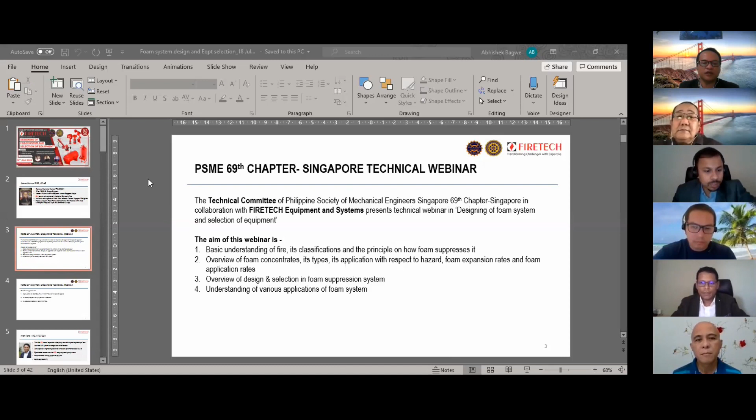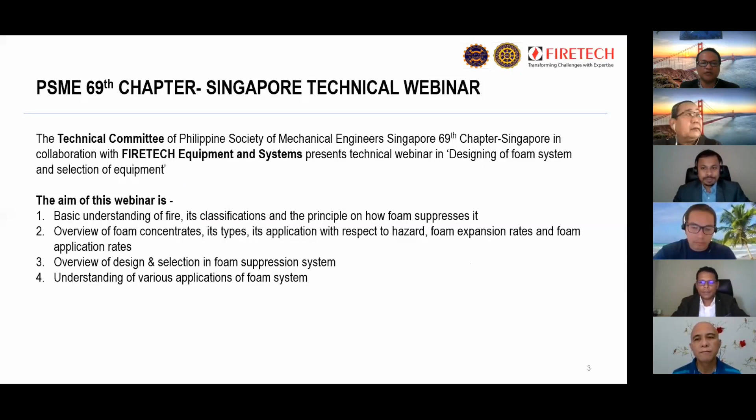Then, oh, sorry. Wait. Where's the screen now? Abhishek. Just give me a minute. There was a bit of a technical glitch, a small thing. So I can control, right? You maximize the screen? Yeah, I'm just doing that. Can you see it? Okay. Apologies. No problem. So these are the speakers for today. I myself, then second is Mr. Kiran Rane. I can control the page, Abhishek, right? Maybe I request for control. Okay, now I can control. Wait, better Abhishek, you can control. Sorry, I cannot control here.

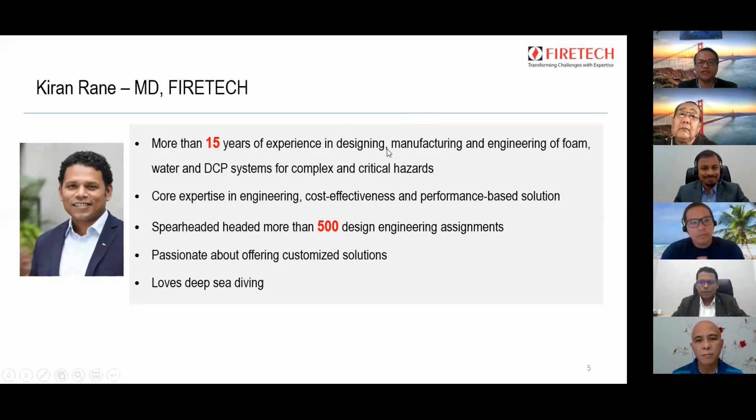So Mr. Kiran Rane, sorry for that technical thing. He has more than 15 years in designing, manufacturing, and engineering foam, water, and DCP systems for complex and critical hazards. He has core expertise in engineering, cost effectiveness, and performance-based solutions. He spearheaded more than 500 design and engineering assignments, is passionate about offering customized solutions, and loves deep sea diving. There's a lot of this in the Philippines. Yeah, sure. So I'll be there to have a deep dive.

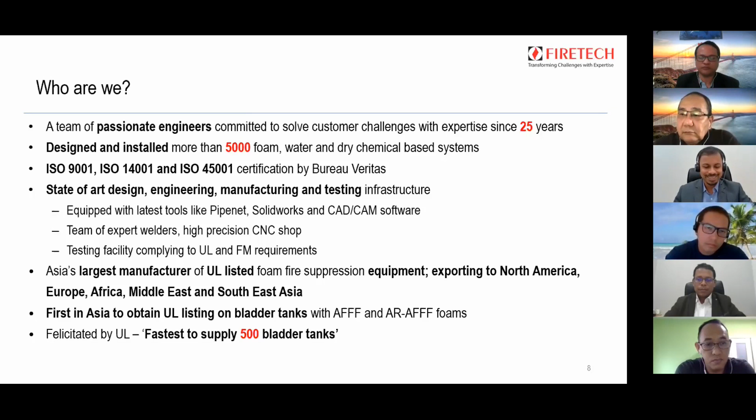With that, I move on, and James, you can take it forward, and we come in as and when required. James, over to you. Okay. Thank you so much. Just help me with the control, yeah? Okay. Yeah, sure, not a problem.

Now, before our specialists go through the detail on the foam suppression system, wherein they are going to talk about design, selection of equipment, application rates, foam proportioners, bladders, let me go through the basics first, okay? It's good to understand the basics before we go to the complicated ones. It's always the basics that will give us the full knowledge. Now, as you can see here, this is the tetrahedron of fire. For fire,

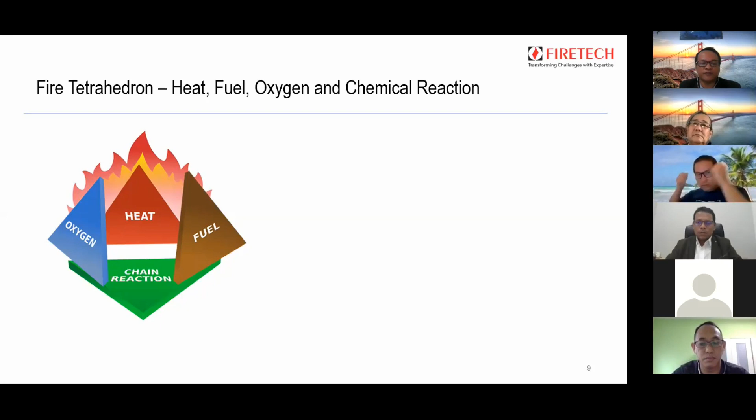So what is fire? Fire has basic elements. Number one is fuel; it is the material that burns. Then we have the oxygen; it is the one that oxidizes the fuel to release energy. Heat initiates and sustains the oxidation process. And the chain reaction that combines these three sustains and propagates energy release.

So by taking out any one from here, either the fuel, or you take out the oxygen, or you don't apply heat, there will be no fire; it's going to be extinguished. So I hope this basic is very clear to us. Next page.

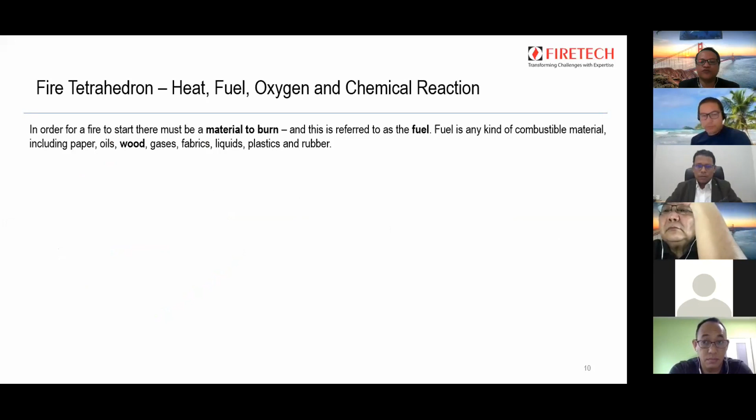In order for a fire to start, there must be a material to burn, and this is referred to as the fuel. So fuel is any kind of combustible material, including paper, oil, gases, fabric, etc. Now, let me just tell you this basic thing. How does a fire ignite? If you can see on the screen, let's say the fuel is a paper.

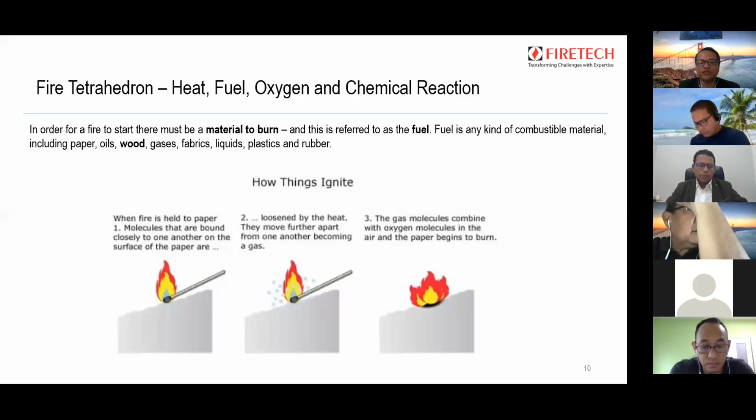Paper, originally the molecules are intact to each other. Upon applying heat, these molecules will separate or loosen further apart from one another, becoming gas. Those gas molecules, when exposed to air, which has the oxygen, are the ones that begin to burn. And later on, you can see that is where the foam comes in to blanket that vapor and the fire.

There are different types of fire. Type A is a combustible fire that has wood, paper, and cloth as fuel. Type B is flammable liquids: gasoline, propane, and solvents. Type C is a fire created by electrical equipment such as computers or machinery. Type D is combustible metal such as magnesium or lithium. And type K is cooking media such as oil.

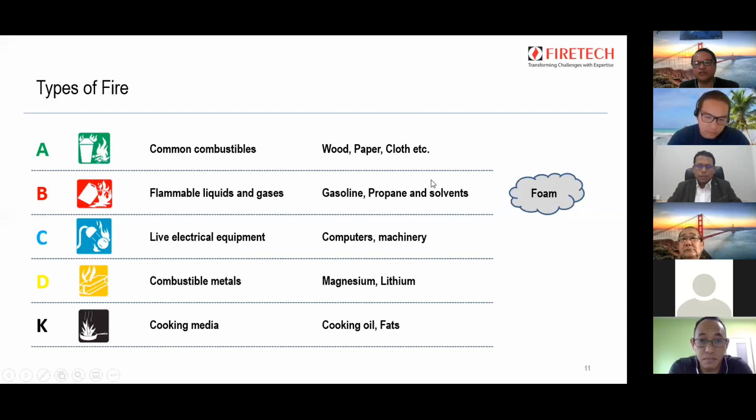The foam suppression, the foam itself, will come to type B. So next click. So the foam is the one responsible to extinguish the type B fire. Then from there, it involves two types of type B products: hydrocarbons and polar solvents.

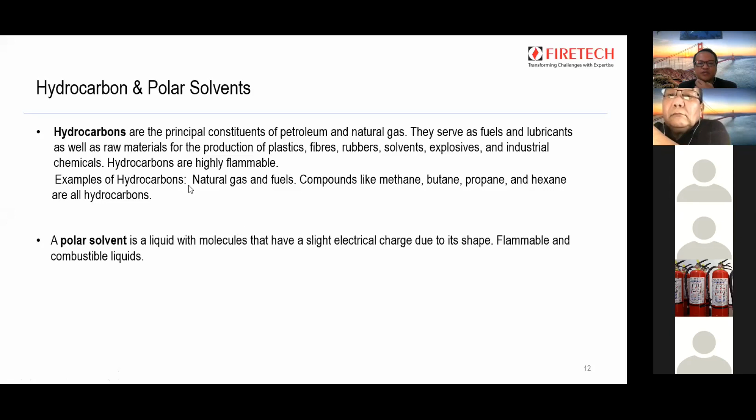In hydrocarbons and polar solvents. Hydrocarbons are the principal constituents of petroleum and natural gas, fuels and lubricants, as well as raw materials such as fibers, rubbers, and explosives. Example of hydrocarbon,

You can hear me? You can hear me, right? Okay. Yes, okay. I can hear you. I saw my screen, unmute the speaker.

Natural gas and fuels, compounds like methane, butane, propane, and hexane. A polar solvent is a liquid with molecules that have a slight electrical charge. Examples of these are acetic acid, methanol, ethanol, and butanol. Both hydrocarbons and polar solvents are highly flammable and combustible fuels or liquids.

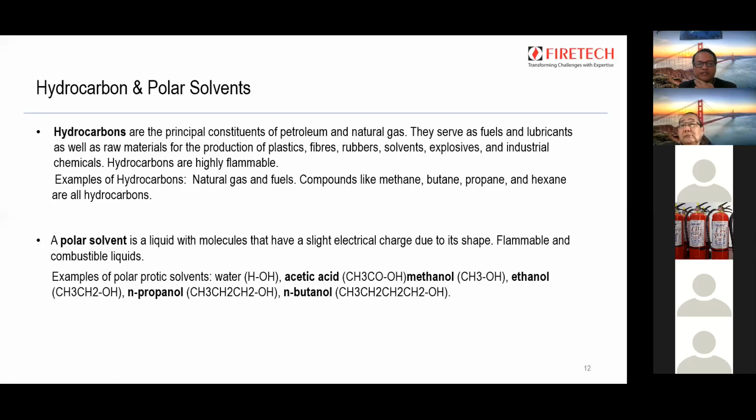Okay, how does foam extinguish fire? You remember a while ago, I talked about when fuel is heated, it will create a vapor. So when foam is applied, it will create a layer of foam. This layer will isolate the air outside, including the vapor formed from the fuel itself, so that continuous fire will not push through. In other words, there is blanketing happening here of the fuel from the oxygen.

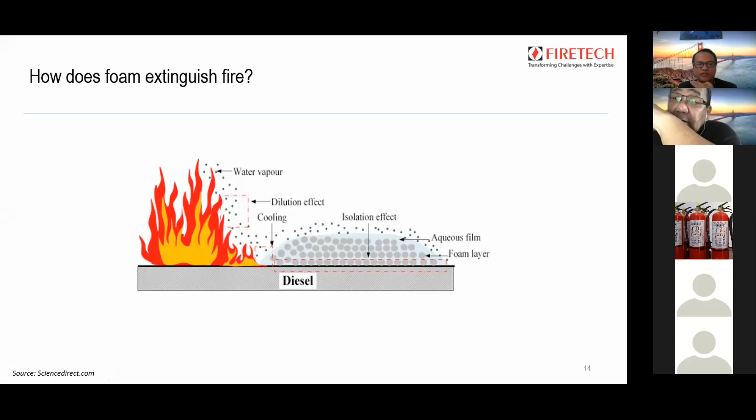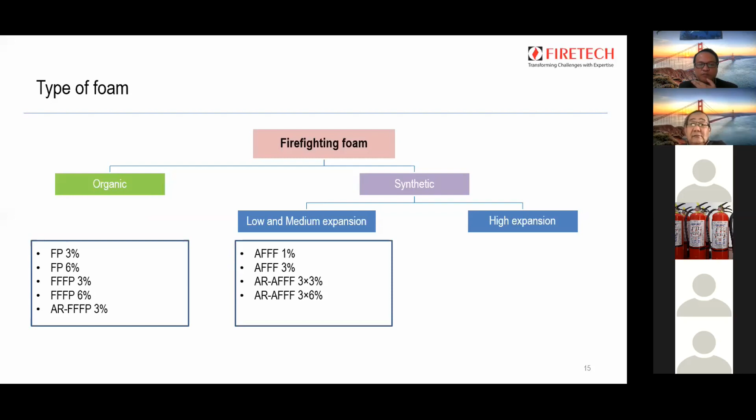We have types of foam. For firefighting foam, we have organic and synthetic. Under organic, we have the FP or FFP. Later, I'll tell you what's the meaning of this. AR-FFFP, 3%, 6%. Same thing in low and medium expansion and high expansion. Then next page.

Protein foam, that's the FP. This is a foam that is composed of biodegradable materials. They flow and spread slower, but provide a foam blanket that is more heat resistant and more durable. Next.

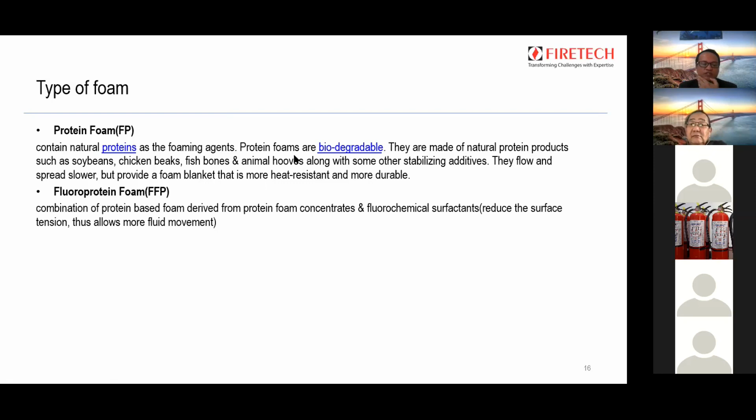The FFP or the fluoroprotein foam. This is a combination of protein-based foam derived from protein foam concentrates and fluorochemical surfactants, meaning this foam reduces the surface tension. That's why this foam has a good flowing movement.

Next is the AFFF or the aqueous film forming foam. This is a foam consisting of fluorochemical and hydrocarbon. This is like the improved FP and FFP. It is designed for rapid knockdown, but sacrifices heat resistance and long-term stability.

Next. The FFFP or the film forming fluoroprotein. This again is a foam with more advanced fluorochemical surfactants. It combines the burn-back resistance of FFP and the knockdown power of AFFF. So it's a combination of these two.

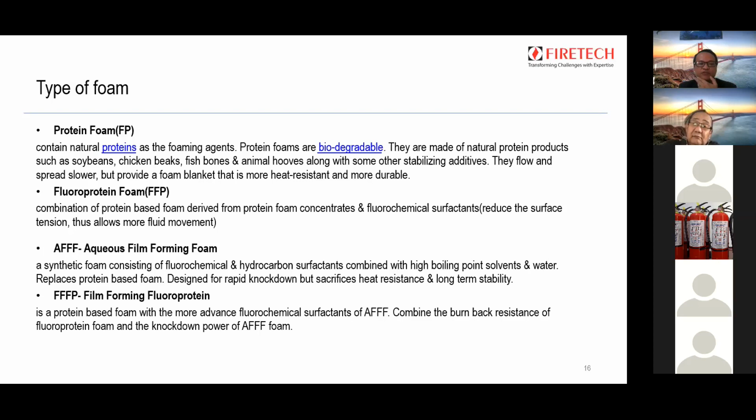Finally, there is AR-AFFF. What is AR-AFFF? This is the alcohol-resistant foam. The alcohol-resistant foam is the latest foam that's being manufactured. It's a synthetic foam, wherein this foam can be applied in both hydrocarbons and polar solvents.

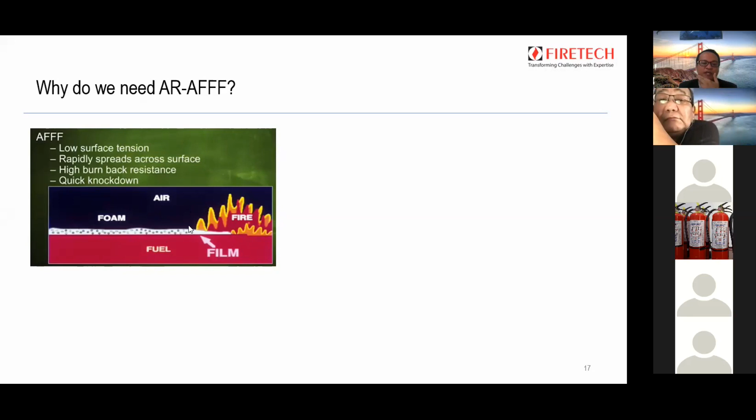So if you can see in this figure, normally if they use the AFFF foam here, because it rapidly spreads across the surface, a thin layer will happen. But when we use it on polar solvents, that thin layer can easily be broken down. So that's why ARFFF was introduced into the market. This ARFFF can resist the solvent from destroying the foam blanket. In a sense, it's more viscous. Okay, next.

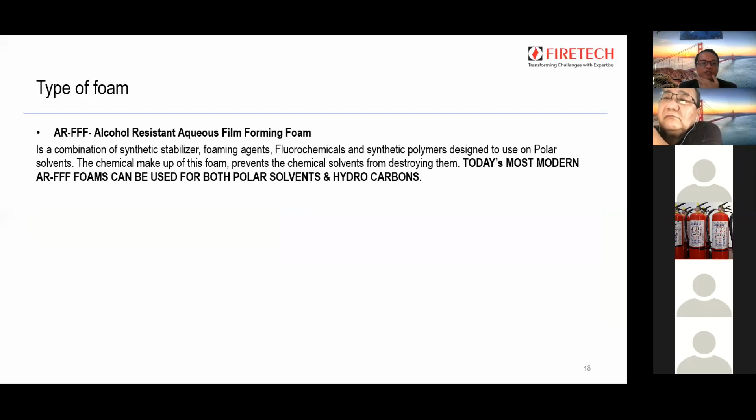This is the ARFFF aqueous foam. It is a combination of synthetic stabilizer foaming agents, fluorochemicals, and synthetics. Like I said a while ago, today's most modern ARFF foams can be used on both polar solvents and hydrocarbons. That's why for most of the solvents being considered, they opted to go for alcohol-resistant foam. So we go to the chart.

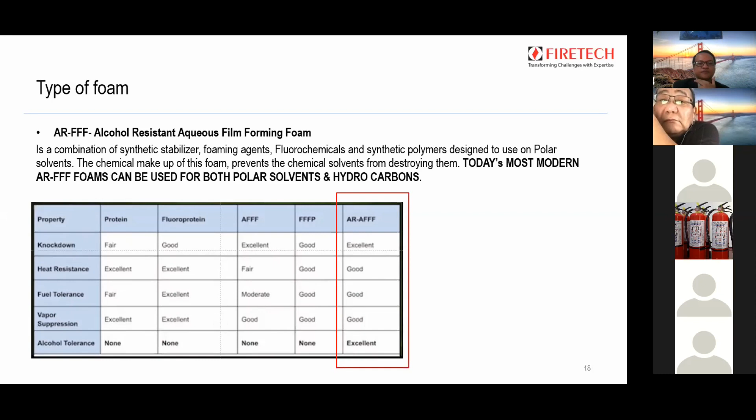And then the foam expansion types. Okay, you just tell me if I'm too fast. It's okay. Okay.

After knowing those classifications, foams also have expansion ratios. For low expansion, it is up to 20 times. For medium expansion, it is up to 200 times. And for high expansion, it is more than 200 times.

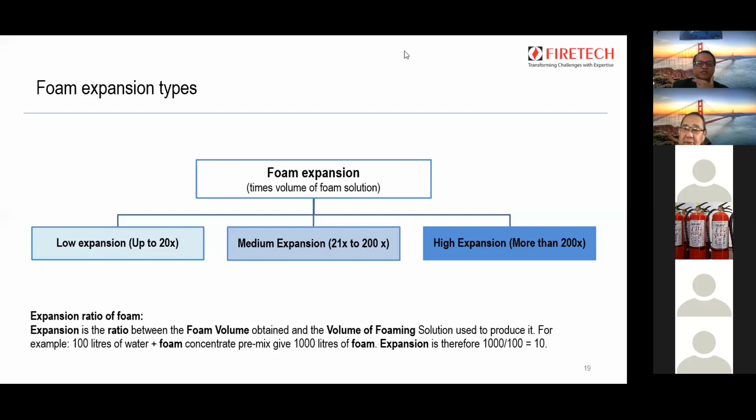Next. The meaning of this expansion is this. For example, you have 100 liters of water. You add the foam concentrate premix and that gives 1,000 liters. The expansion ratio will then be 1,000 divided by 100, which is 10. So it belongs to low expansion foam.

So next. Yeah. So those are the basics of foam. You were able to know how it extinguishes fire, what the types of foam are and which foam is really good to use in the market now, and you were able to know the expansion rates of foam.

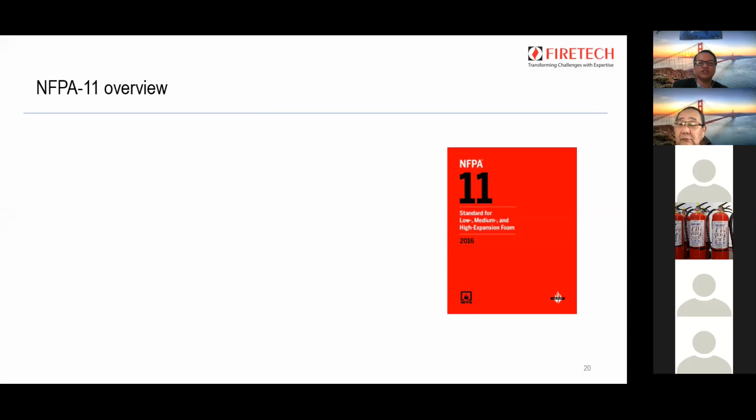Now, for the next topic, there will be an overview of the NFPA and a more detailed discussion on the equipment, application rates and so forth about foam suppression systems. And this will be under Kiran Rain, the managing director of Firetech. So Kiran, I give you the floor.

Okay, thanks, James, and it was wonderful to explain the basics of foam because it's always good to build on the basics. Am I audible, James? Yeah, we can hear you. Yeah, perfect. So James, thanks again, and I would like to take it further from here. So very good afternoon to all of you.

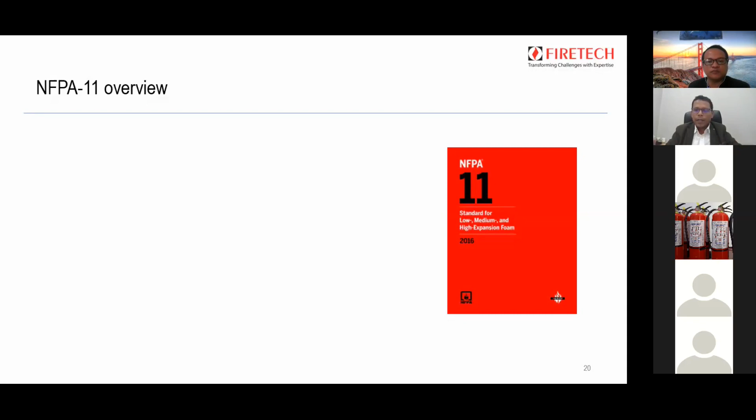Now, basically, we all know that NFPA is the National Fire Protection Association, which is based in the USA, and they have been formulating specific standards related to the different types of fire protection systems existing today in the industry. NFPA 11 has been one of the oldest standards in the industry, and it covers low expansion, medium expansion, and high expansion foam systems. The first edition was published in 1921 by the NFPA committee, and there have been several editions as of now.

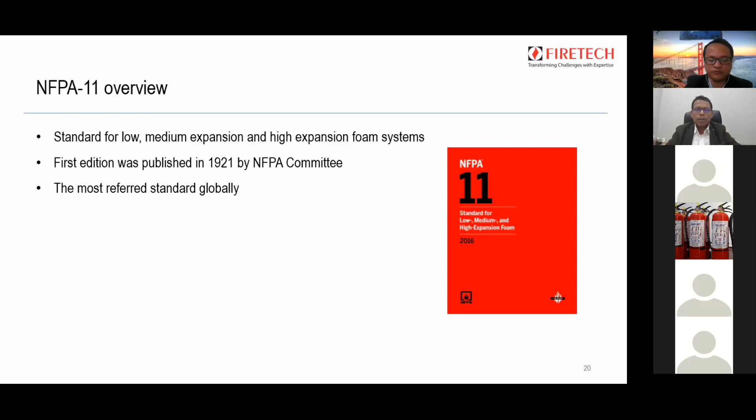And the current edition is 2016. We expect that 2020 would also be soon published by NFPA. And this is one of the most referred standards globally. It has been referred by various firefighting professionals, right from designers, consultants, HSE officials, as well as certification agencies like UL and FM. So this standard also covers how to measure the performance of a foam system, and major approval standards have been based on NFPA 11 specific to the foam system.

This standard basically addresses the 5 critical issues. The first being the design, how to go about designing the different types of foam systems, again with respect to every hazard. What should be the specification and plans for a foam system? The installation requirements with respect to how to install the system, what is the environment in which the system should operate, what are the operating parameters.

The most important part is the testing and acceptance. Designing a foam system is one thing, but ensuring that the foam system is able to perform and give the desired design performance is of utmost importance, because ultimately the foam system is designed to perform.

And most of the times, as per my experience, I found that testing and acceptance in some geographies has been on a lower context, and this is where we are experts in taking responsibility right from the design stage to the commissioning stage. We also depute our engineers globally wherever it is required to commission a system with respect to the design parameters, and we also give a test report related to it.

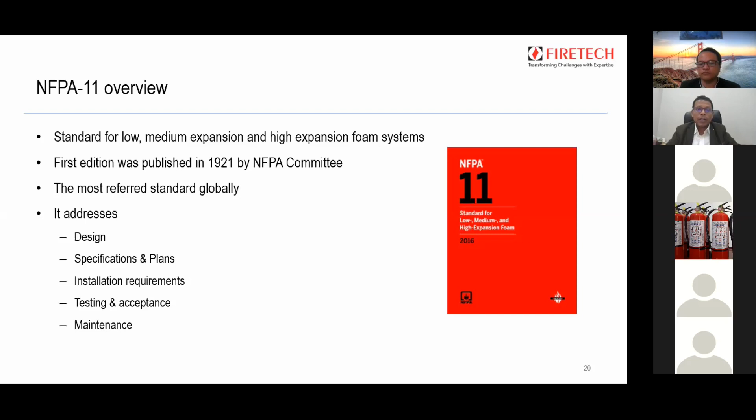Yeah, Abhishek. So basically, there are various hazards protected by NFPA 11. NFPA 11 is a very extensive standard. Actually, this whole webinar of 1.5 hours cannot cover the complete in-detail design aspects and all the hazards which can be protected by NFPA 11. So what I have done is, we have classified the foam system based on the expansion values, because that is how people specify a system, either to go for a low expansion, or a medium expansion, or a high expansion.

Now, low expansion foam systems are those systems where the expansion value is limited up to 20. So the expansion value is determined by the foam discharge device, which I will come to later. The expansion value is basically the output of the foam system, which is applied to the fire. So if the foam is expanded less than 20 times, there are various hazards you can protect using a low expansion foam system. Examples are storage tank protections, and these can be hydrocarbon storage tanks or polar solvent storage tanks.

Dike and bund area protection. This is used majorly in the chemical and paint industries to protect the dike in case there is a spill of flammable liquid into the dike, which is quite recurrent in chemical and pharma industries. So this system helps you suppress a fire in the dike. Warehouse protection, where you have storage of flammable, toxic and hazardous liquids. Process platforms like offshore process platforms or even chemical facility process platforms. Helipad protection also comes under low expansion foam systems.

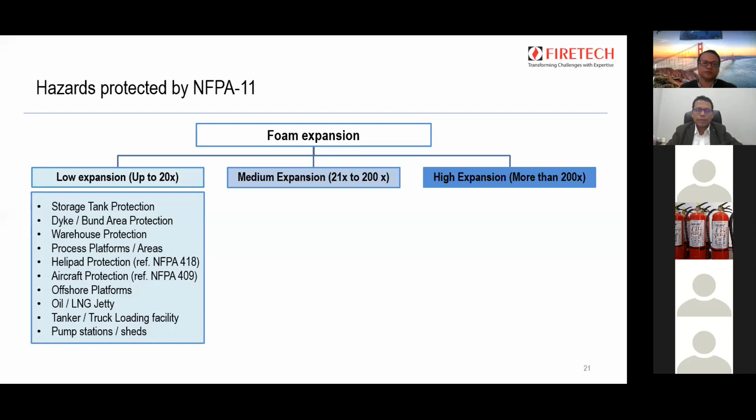So the next category is medium expansion foam systems. Medium expansion foam systems are those where the expansion is within the value of 21 times to 200 times. Now here, the medium expansion foam system was found to be very useful in the Buncefield fire in the UK, which was one of the largest fires in Europe. And there, one of the fire equipment manufacturers used medium expansion foam systems to cover the dike spills, and thereon dike protection has been one of the major areas.

So medium expansion actually has the benefit of both low expansion as well as high expansion. The advantage is it has a high volume of foam production because the expansion value is high, and secondly, it fills up the area in much less time. And third, it can also be used for vapor suppression. Sometimes there are toxic or flammable liquids that spill before catching fire. If the hydrocarbon detectors detect it, you can activate the foam system even before the fire, and this can be used to suppress the vapor as well as salvage the product.

It can also be used in indoor process rooms, like most of the companies who manufacture pharmaceutical products, and also in open process areas. But the major requirement is that a medium expansion foam system should be provided with a dike wall so that it can contain the foam.

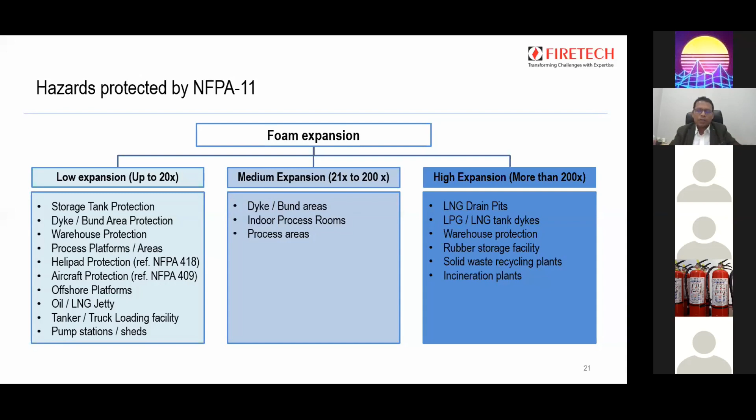Slowly, we have seen that even warehouse protection is moving to high expansion foam systems. We have done a couple of projects, especially in Europe, where for warehouse protection, instead of sprinklers, they prefer to go with high expansion. Rubber storage facilities, the warehouses which store rubber products, are one of the major hazards protected by high expansion. Solid waste recycling plants and incineration plants too are finding applications for high expansion foam systems nowadays.

Now the most important topic: when you design a foam system, it all starts with the foam application rate. Before the application rate, it is what type of foam system is going to be used. Once the type of foam system is decided, there is a proper methodology to go about the application rate. So what is the application rate? To make it simple, it is the amount of foam to be applied in a specific area within a specific time. I'll repeat it: the foam application rate is the amount of foam to be applied in a specific area within a specific time.

Now let's look at the low expansion foam system. Here the foam application rate is defined either in LPM per square meter, that is liters per minute per square meter, or GPM per square feet, that is gallons per minute per square feet. Either of these units is used for defining how much foam solution should be applied to the area.

The second consideration is the fuel type, whether it is hydrocarbon or a polar solvent. In case studies or reviews of specifications, we have found that in some cases polar solvents were protected using just AFFF foam. And to be honest, if you apply AFFF foam, it is not going to extinguish a polar solvent. No foam will be formed because the alcohol drains the foam completely. So fuel type consideration is of prime importance, I would say.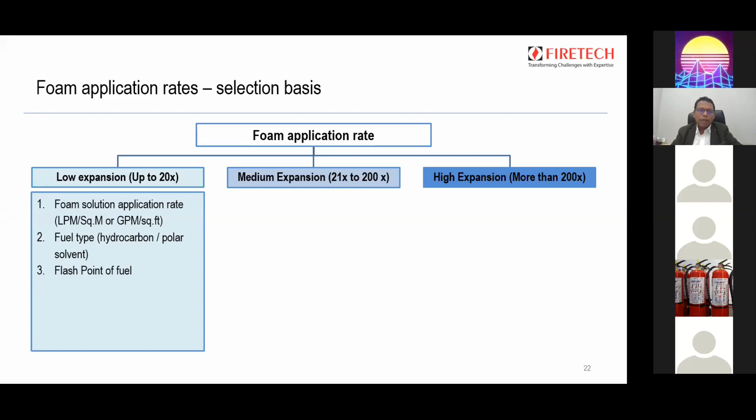And also the flash point of the fuel, because the operation time of a system changes as per the flash point of the fuel. So if we are designing a low expansion foam system, whether to protect a storage tank, a dike area or a warehouse, these are the basic considerations which have to be considered by the designer to decide the foam application rate.

Now coming to medium expansion, medium expansion foam systems are those where the expansion ranges from 21 to 200 times. As we have seen in low expansion, the application rate is in liters per minute of foam solution. But as per NFPA 11, the medium expansion foam system is designed based on the output of the generator. So first we have to know the output of the equipment selected, the expanded foam output of the generator, whether in cubic meters per minute or cubic feet per minute.

Second is what is the class of fuel and the test data. So test data is,

James, can I just have a check? I hope all are able to understand, right? And I'm going slow, my pace is decent enough. Yeah, it's okay, it's clear. So they can post yes in the chat if they want. I'll just wait for a minute before I go ahead. If anyone finds it too slow, please chat me in the chat box, and I'll just feedback Kiran. So you can hear me, yeah, Kiran? Yes, I can hear you. Okay. So far it's clear. Okay, so I can move ahead, James? Yeah.

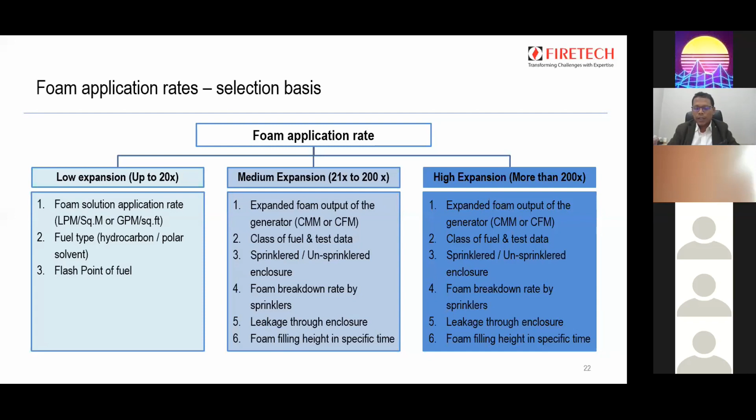Now we move to high expansion foam systems. So high expansion foam systems and medium have the same criteria. Only the difference is the expanded foam output of a high expansion is much higher as compared to a medium expansion foam system. And rest it remains the same. Class of fuel, enclosure sprinklered or unsprinklered, foam breakdown rate by sprinklers, leakage through the enclosures, and the foam filling height.

Now the most important question, which I want to emphasize on and make everyone understand, is how the listing of the foam equipment takes place. So the first step in the whole listing process of the equipment and the foam is the foam concentrate is fire tested as per the test protocol mentioned in UL 162. UL 162 is a certification standard for low expansion foam equipment. So they have a test protocol where the fire test takes place, and the foam concentrate is tested as per that protocol. Once the test has happened, the foam qualities are identified during the fire test, and these foam qualities for low expansion are very specific. One is the foam drainage, and one is the foam expansion.

So foam expansion is nothing but how many times the foam is expanding, and the foam drainage is in what time period the water is draining from the foam. And based on these two, step 1 and step 2, then the equipment is tested. The performance of the equipment, say for example, if there is a foam maker or a foam pourer, then the foam maker and the foam pourer has to match the foam qualities of the fire test, that is the expansion and the drainage. And that is how the culmination of all these 3 steps ensures that the equipment is able to produce the foam of the required quality. And that is of utmost importance.

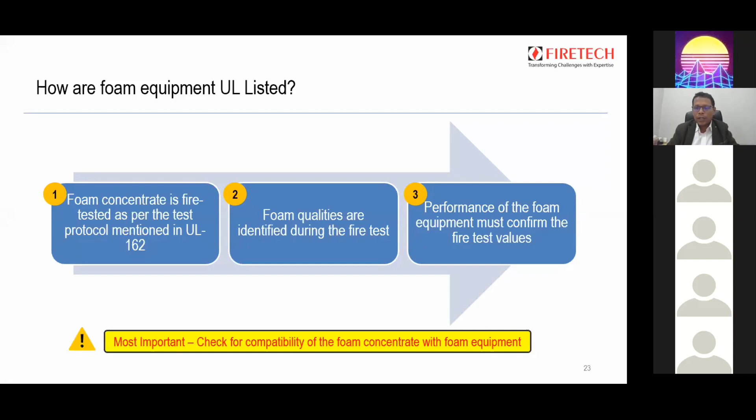So you always have to check for the compatibility of the foam concentrate with the foam equipment, and with all this data we can help you with any of the manufacturers, because this data is globally available on the UL Online Certifications Directory. And this is very important because that foam has to be specifically compatible with that foam equipment so that the whole foam system operates as a system and is able to generate the desired output of foam which can extinguish the fire. Next.

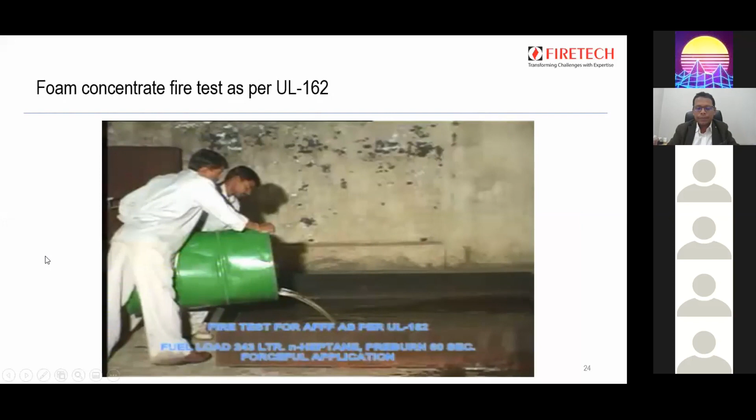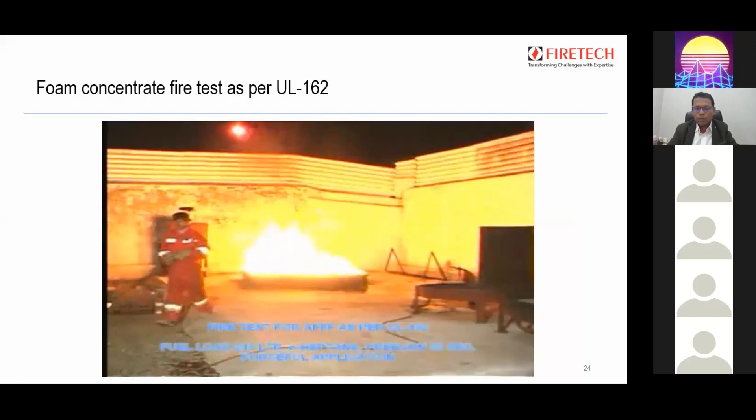Now we just run through a heptane fire test. This is a foam concentrate fire test as per UL 162. So this is a fuel load of about 243 liters of heptane. Now heptane is a test fuel used to represent a complete range of hydrocarbons, that is gasoline, petrol, diesel, SKO, and MTBE. So this is the pre-burn which is happening, and there is just water being put on the side of the pan.

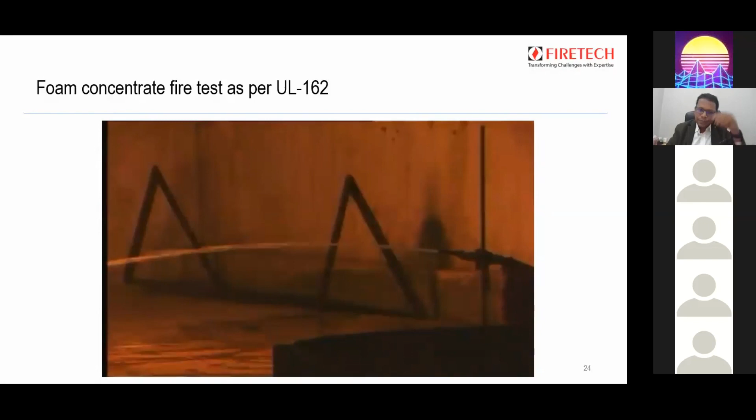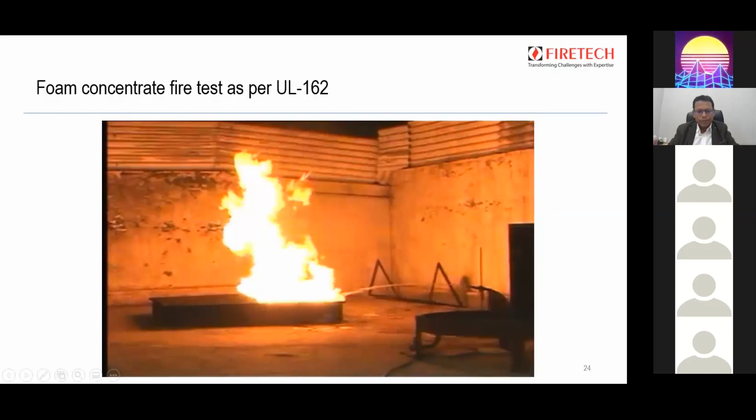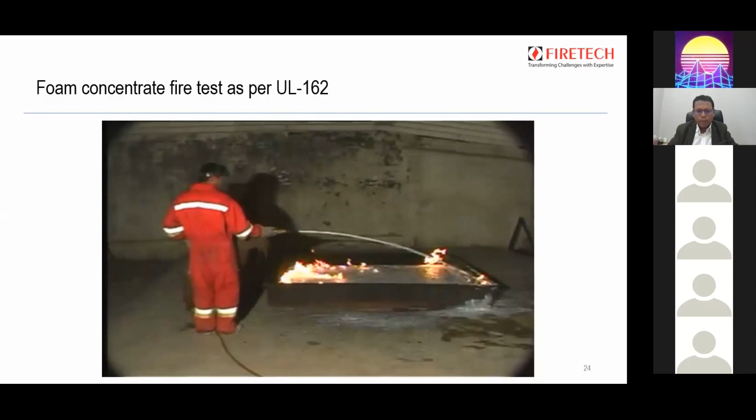So the foam has not yet started. It is just the water. And a pre-burn of about 1 minute is given to it. And all the test pan and everything are in line with the UL specifications, that is UL 162. And now the foam application has started. And this is how the foam extinguishment takes place. You can see flickers of fire, and the foam is trying to fight out the fire.

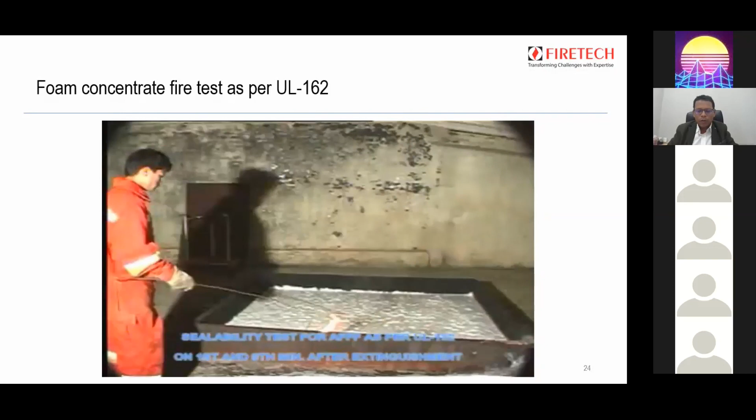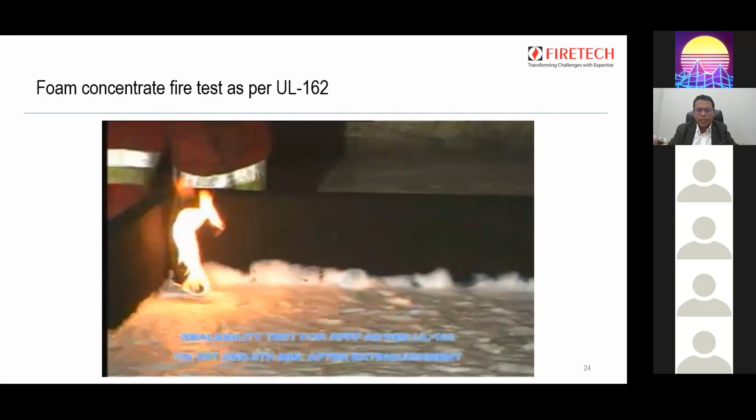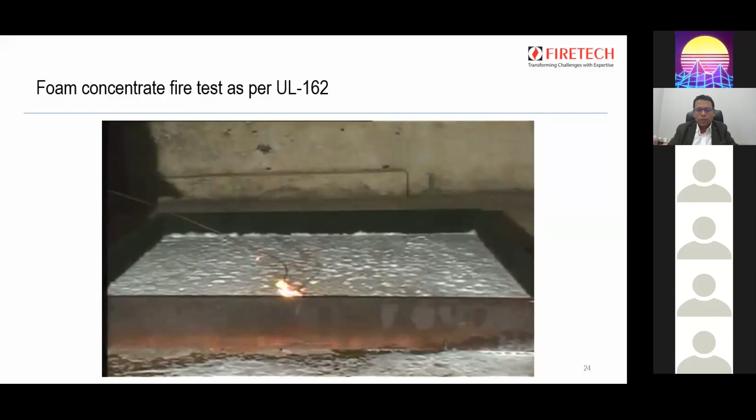And this is a torch which is used for the sealability test. Now the biggest challenge for any foam is to seal the edges, because the edges are hot after the fire, and the foam should be capable of sealing the edges, because if the edges are not sealed, the fire will reignite again. So here they are checking how the foam has sealed the edges of the fire test pan. And the torch is also passed over the surface to see if the blanket integrity is intact.

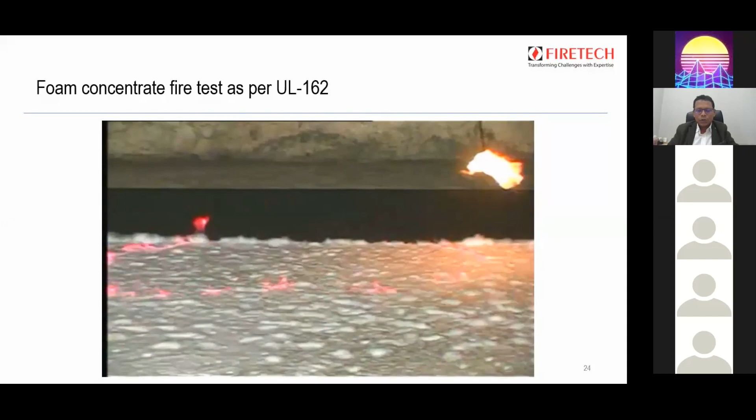So you can see that there are small flickers, but still it has not become a fire, because the foam is good enough to sustain those flickers, and this is called 90% control of the fire.

Yeah, Abhishek, you can move to next.

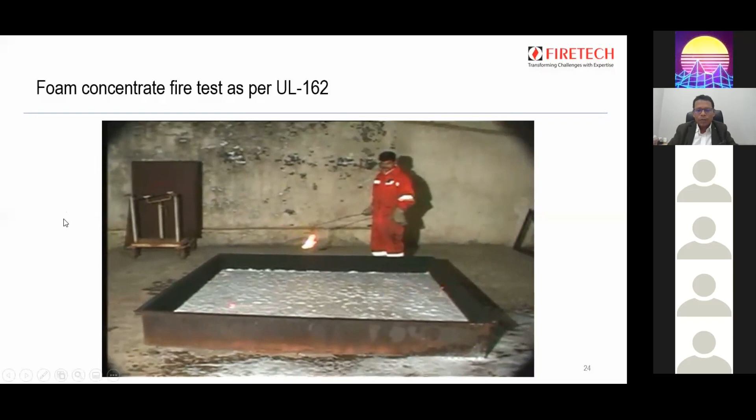So what are the basic components of any foam system? The basic components of any foam system consist of three main components. One is storage, second is proportioning, third is the discharge devices. Now, what do you mean by storage? The purpose of storage equipment is to store the foam concentrate with minimal deterioration, that is disintegration of the chemistry of the foam. Examples of such are atmospheric storage tanks and bladder tanks.

Now, after storage comes the second component of the system, which is proportioning, that is mixing of water and foam concentrate. I would like to emphasize that this is the heart of any foam system. However good you might have the foam, the best quality of foam, however good might be the discharge device which is going to make the foam and put it on the fire, if the proportioning is not accurate, nothing works in a foam system. This is the heart of the foam system.

So proportioning is nothing but mixing of water and foam concentrate. What's the purpose? The purpose is to ensure accurate mixing of foam concentrate with water. And this is what UL has witnessed, the complete mixing of foam concentrate into the water at various flow ranges at our test facility. And this is what gives the UL listing.

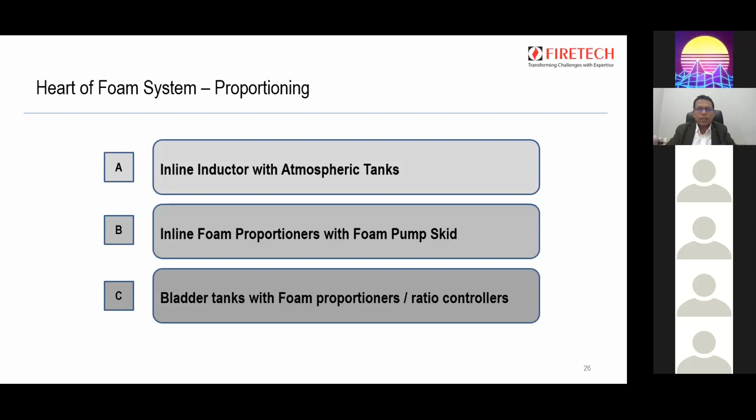So let's have a look at type A, that is inline inductor with foam storage tanks. This type of system is the lowest cost foam system available on the market. It just consists of an inline inductor with some piping arrangement, as you can see in the picture. This is an inline inductor, and there's a piping arrangement, that is suction, which goes inside the tank. And this is the foam storage tank, which stores the foam concentrate. This foam storage tank is open to atmosphere.

It is only suitable for fixed pressure and fixed flow. Most of the time we have observed that inline inductors have been used in systems where the pressure varies or the flow varies, and the whole system malfunctions and is not able to suck the foam, and it goes for a toss when the system is operated.

So all the designers, all the professionals have to ensure that this type of system is used in a hydraulically calculated system, where you know the exact pressure at the tapping point and the exact flow. Any variance in flow and pressure will lead to stopping the foam from being sucked, or there would be less pressure at the foam discharge device, which would affect the foam formation.

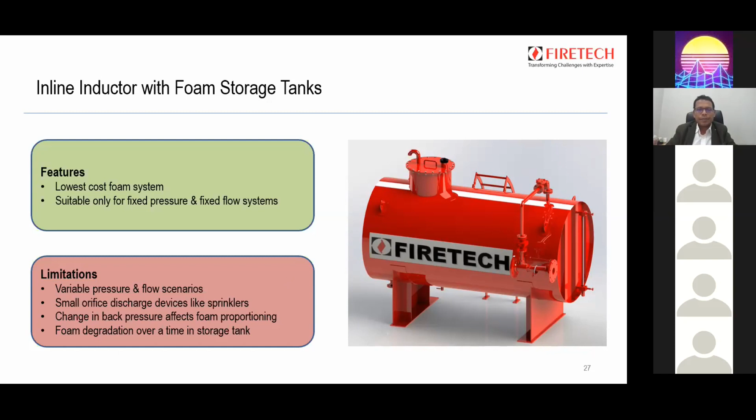For example, if this system is provided for a storage tank terminal, you can use the same foam storage with the same foam pump and different inline proportioners to protect oil storage tanks, to protect a dike, to protect a warehouse, to provide foam solution to remote control monitors, and so on. So this is what I mean by multiple zones.

It can take care of variable flows and pressures. Say one system requires a flow of 2000 GPM at 5 bar, and another system requires a flow of 4000 GPM at 7 bar. It can work, and proportioning is ensured. Also, refilling of foam is possible during operation. So if the required logistics of foam transfer are available at the fire site, you can refill the foam during operation.

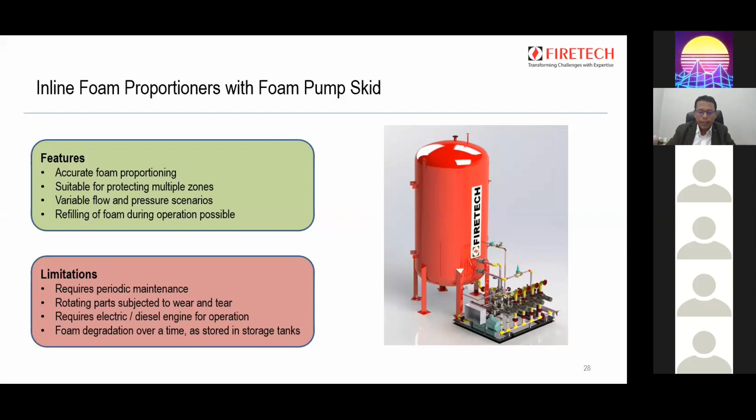Abhishek, next. Now, bladder tanks with foam proportioners and ratio controllers. This is also one of the most reliable foam systems which have been accepted by consultants, system owners, and oil refineries across the globe, because it is the most accurate foam system and simple and reliable to operate. Again, you can use it for protecting multiple zones.

As you can see here, this is the main bladder tank and the reserve bladder tank in the picture. And it consists of multiple proportioners. So from the same skid, we can protect multiple areas. And in case one bladder tank is in maintenance, we can operate with the other bladder tank. And this arrangement is very peculiar to aircraft storage hangars, wherein the foam is to be replenished within 24 hours, which is not possible. So every aircraft hangar has a main bladder tank and a reserve bladder tank.

So again, bladder tanks take care of variable flow and pressure scenarios. The most important thing is the foam bladder, which is the heart of the bladder tank, and it ensures integrity of the foam, because the foam is not exposed to the atmosphere at all. And the bladders manufactured by us have passed the UL 162 aging test with air and with foam concentrates, and in the field they have given a service of about 13 to 15 years till now without any issues.

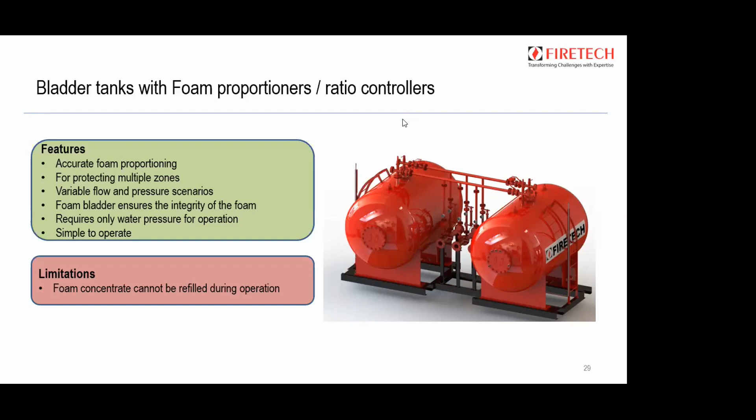And the best part of this system is it just requires water pressure to operate, nothing else. There is no electrical power required, there is no prime mover required, it is just the water pressure. And the bladder tank will take care of automatic proportioning depending on the flow rate and the pressure. It's very simple to operate. It can be completely automated using deluge valves and a foam control valve, or it can be a manual system too.

Limitations: it has just one limitation, that is, the foam concentrate cannot be refilled during the operation. So generally bladder tanks are designed as a single shot system, where the bladder tank is sized such that it will operate for the complete operation time as per the standard requirement. So for example, if we give these bladder tanks for storage tank protection and 55 minutes is the duration, then one bladder tank is sized for a 55-minute operation. And additionally, a reserve bladder tank can be provided.

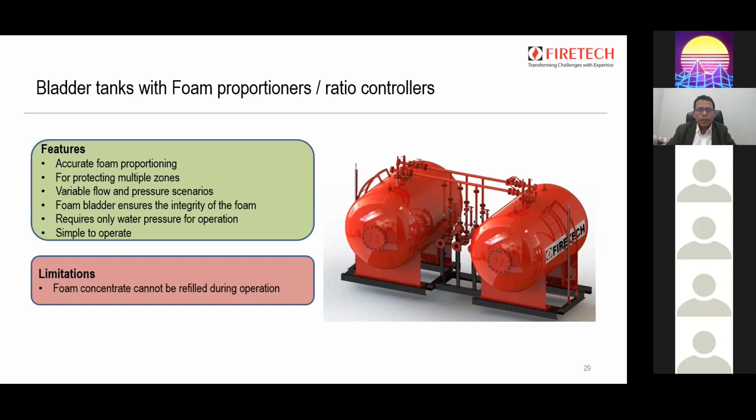Next. Now, I would just like to take this presentation forward. Yeah. So do you guys have any questions on what I have presented till now? Any questions? Please post them so that I can move to the next section of the webinar. Yeah, and James, please note the questions. If any, we can address them in the Q&A session. Yes, I'm summarizing all the questions. Perfect. So can I go ahead, James? Yeah, go ahead. Should I take a pause for a minute? You can go ahead. Okay, fine.

So now this slide represents a typical arrangement of how a foam system is provided for aircraft hangar protection. First of all, whether there is a requirement of a foam system for an aircraft hangar or not depends on the type of hangar and the group of hangar as per NFPA 409. Whenever a foam system is provided for an aircraft hangar, it can be either overhead sprinklers with a low expansion foam system, that is option one, or the second option is a high expansion foam system.

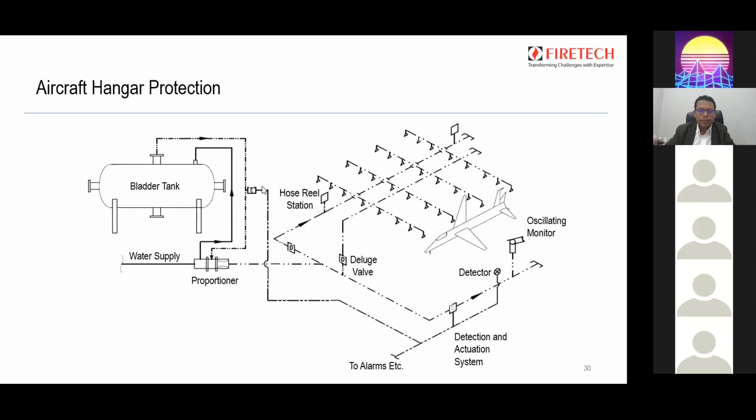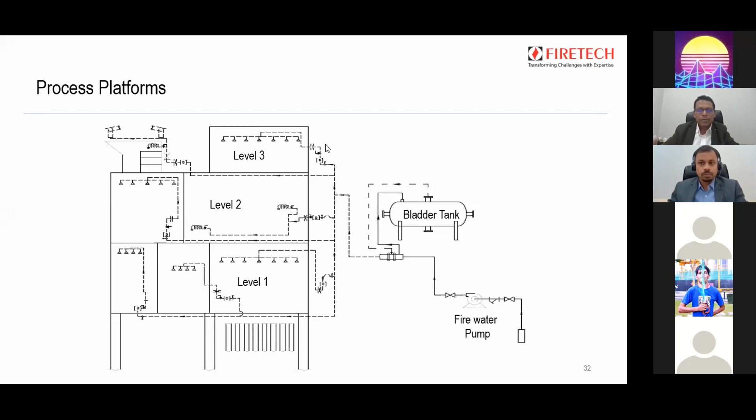Next step. Now this is a tanker and truck loading facility, which is quite peculiar in terms of marketing installation, that is where the distribution of the petroleum fuels takes place through tankers. So here the major risk which is involved is during the unloading and loading of the fuel from the truck or the tanker. So this is a complete automatic system which consists of detector heads.

Earlier, the automatic sprinklers used to be used as a detector head, but nowadays you have highly efficient and reliable UV-IR, IR3 detectors. Even HD video feeds are available from our end, where not only the fire detection can take place, but also the safety personnel can see the video sitting in the control room. So the detection is wired to the control panel. Then there is a bladder tank with ratio controller.

Then there is a deluge valve provided in the system for the automatic actuation of the foam system from the control room. And there are foam sprinklers provided at the top, and they're also always provided at the side of the tanker, so that the complete area in case of a fire is sprayed with foam. And this is how the whole gantry is protected. One foam system can be used to protect multiple trucks. In India they are generally called TLF, that is tanker loading facility.

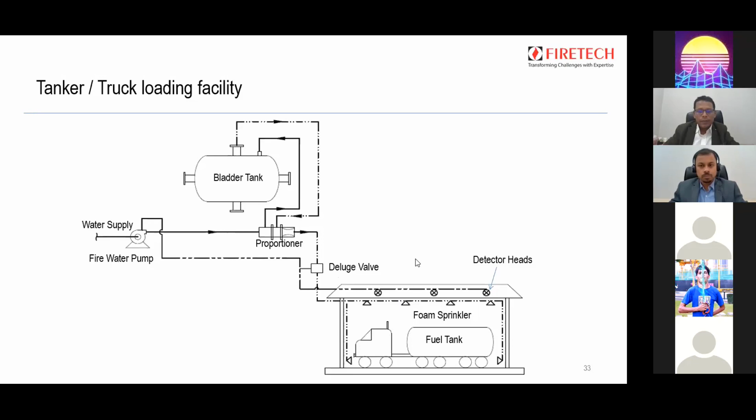Now this is a dike or a bund area protection. This is very specific again to chemical industries, petroleum industries, where you have a lot of oil tanks or process tanks. Like also in paint industry, there are a lot of small solvent tanks inside the dike. And these solvent tanks have a lot of process connections, a lot of instrumentation, a lot of flange joints. And in due course, due to fracture of some of the piping or of the sealing elements like gaskets, there are chances of the flammable fuel spilling into the dike. And once a dike spill catches fire, the whole of the tanks as well as the dike are in fire.

So in this case, the medium expansion generators are mounted around the dike, and the bladder tank with proportioners and deluge valve are provided. And again, here also the detection can be provided on the dike wall. You can provide either hydrocarbon or even UV-IR detectors, which will detect the fire in seconds, activate the foam system, and this dike will be completely filled with foam.

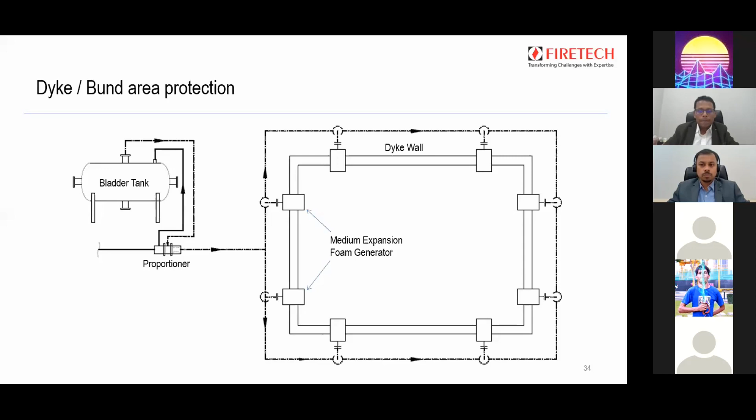Yeah, Abhishek. Yes, Abhishek, thanks a lot. Thanks, and Abhishek, I would like you to take it over further.

Yeah. So thanks, Kiran. So guys, we have seen till now, according to NFPA, what are the different installations in different applications, how are they being used. But that is all theory. And we at FireTech are the people who believe in turning knowledge into practice to solve actual customer challenges. So we would like to share with you some of the case studies from our past experience, where a client had come to us. This is one of the larger LNG facilities in India, and probably one of the larger in Asia.

And the client wanted to have some sort of foam protection system, and a lot of designs were not working because the sheer requirement of foam was much higher. So this is where FireTech stepped in, and FireTech designed the entire system. So this is a foam pump based fire protection system. And as Kiran earlier mentioned, this has a huge foam storage tank, along with a foam skid system. This entire system designing was done by FireTech in-house, and also the fabrication and testing was done by FireTech. The companies involved were Black & Veatch from US and Foster Wheeler from UK.

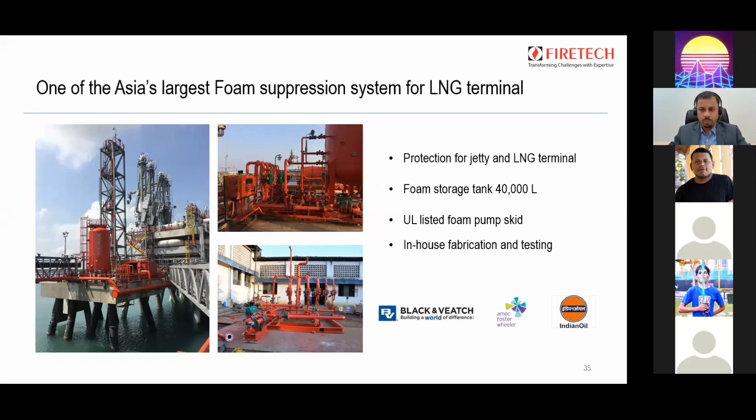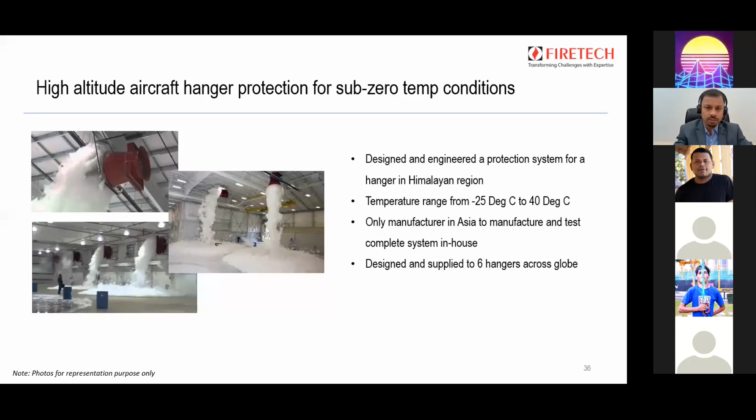Yes, James? Now it's okay. A while ago the signal was lost. Can you guys hear me? Yeah, now. Okay. Oh, okay.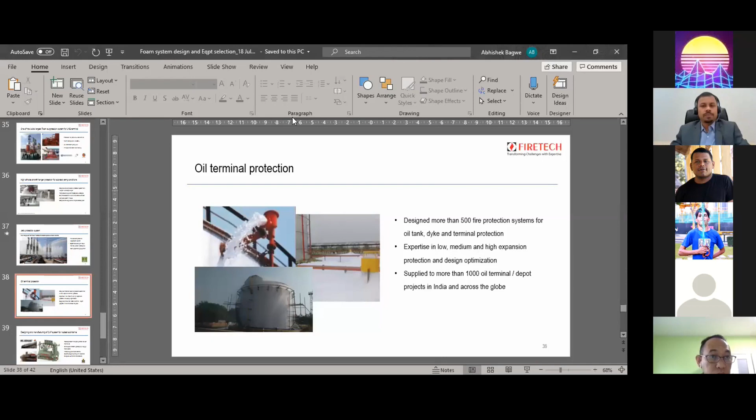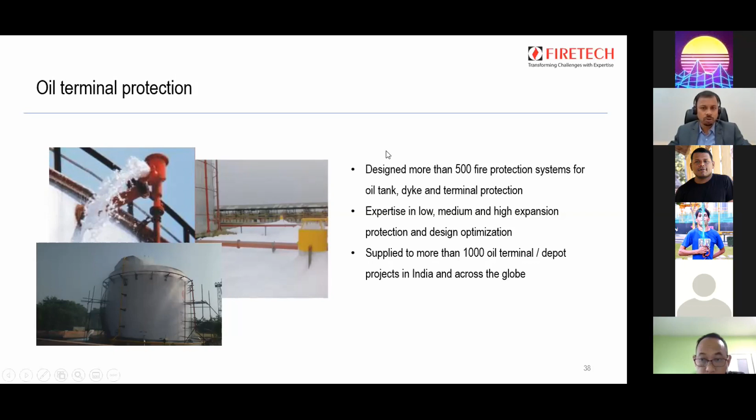So oil terminal protection is the one area where we have literally done it thousands of times. Till date, Firetech has designed more than 500 fire protection systems for oil tanks, dikes, and terminal protection. We have expertise in low, medium, and high expansion systems. We have supplied to more than 1,000 oil terminal expansion and greenfield projects across India and the globe. And these are some of the pictures from actual sites.

Today in the seminar, we did not speak about the CAF system. CAF is essentially a compressed air foam system, and it's an advanced variant of the AFFF or AR-AFFF systems that we speak about. The CAF system has compressed air. This is a particular system that we have designed for a nuclear submarine. The entire R&D for this project was going on for 5 years.

It was an exhaustive process where we started right from R&D to prototyping to demonstrating it to the customer and finally supplying to the customer. Already 8 such units are operational in various Indian Navy submarines. We are supplying another set of such stations. Looking at this capability and the field trials of this product, we have been approached by a couple of European submarine manufacturers for a tie-up and technology development. So this is something that we are exploring and taking forward.

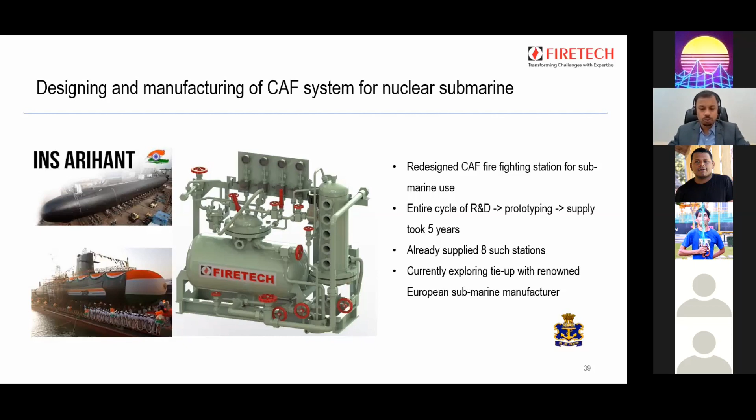So this is a brief of some of the designs which Kiran explained based on NFPA, which we have put in practice. And as mentioned earlier, we have a huge ambition to ensure that our clients get the right solution. To support our solution, we have come up with a wide product portfolio. Right from water to foam to dry chemical, Firetech has a huge product portfolio. Some of our UL listed products I have put in for you to have a look at.

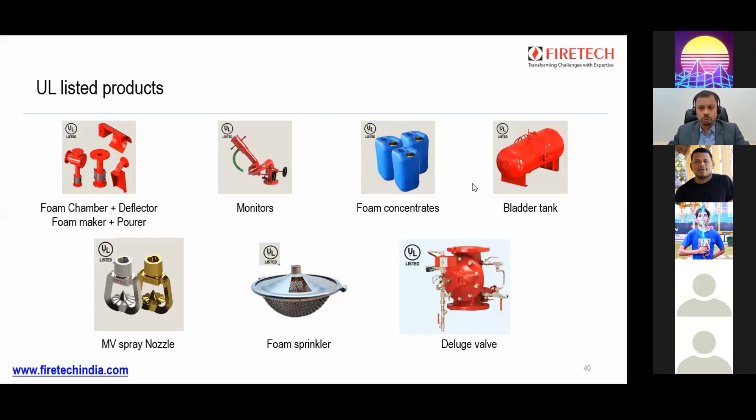Just to finally sum up, it has been a wonderful hour and 15 minutes where Kiran and James have been kind enough to explain about understanding of fire. Just to sum up, we at Firetech serve different industries and we specialize in giving solutions to specific problems that the customer comes up with. We at heart are engineers, and wherever there is a fire safety challenge, we stand up to provide solutions. We believe in our mission, life matters.